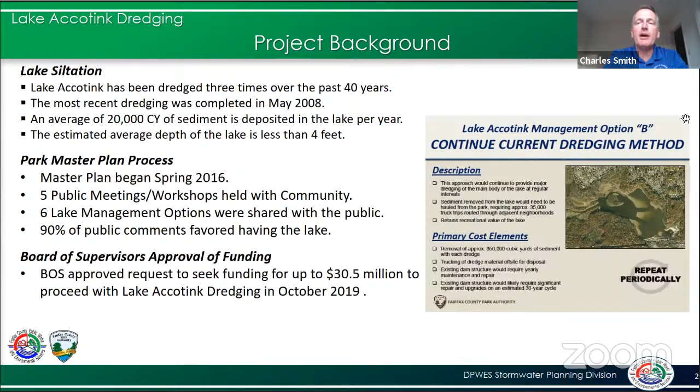Through that master planning process, different management options came out, and what we learned was that the public overwhelmingly supported keeping a lake. That was the impetus for moving forward with option B at the time, which was to continue the current dredging program. The Board of Supervisors approved an initial funding application for a loan amount of $30.5 million in 2019. As Supervisor Walkinshaw also stated last week, the board approved us to move forward with an application for an additional $30 million. I'll remind folks that if that second $30 million is approved, it's not money we will spend necessarily - it's just money that will be made available by the state should we need it. That's the important distinction.

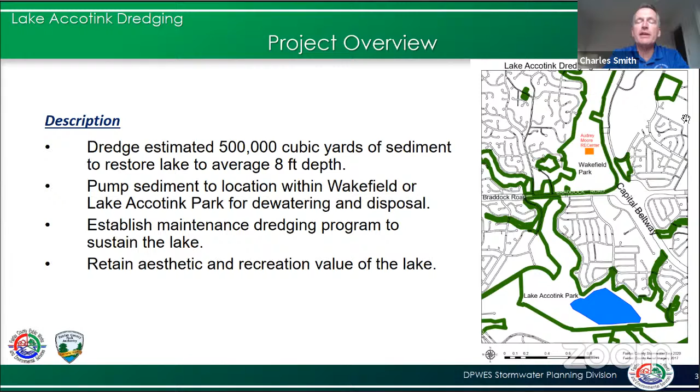In addition, we have to establish a maintenance dredging program, because now we know this lake is filling in rather rapidly from sediment that comes from the watershed above. We'll need to do maintenance dredging on a regular basis. We're not sure exactly what the interval will be, but that'll be part of this project - to decide on the interval needed to come back and do maintenance dredging. Of course, this is largely to retain the aesthetic and recreational value of the lake, and it does remove sediment from the Accotink system.

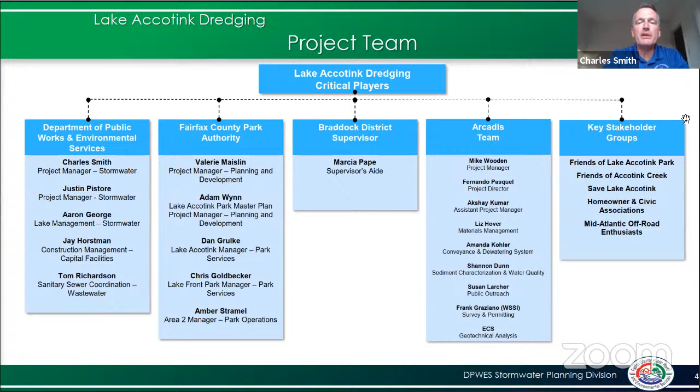So we're at a critical juncture. The alternatives analysis you're going to hear about in a moment is the upfront look at where we can do different activities and how we can conduct them in order to do the project. This is our critical time to hear from you - not only to inform you of what we've learned, but also to hear from you about the things that are most important related to the activities around the dredging.

Once we get all the feedback, August 16th is the closing time for public comment. We will try to make decisions in a rapid way, working with the Park Authority Board and Board of Supervisors, and then report back out. We'll give direction to Arcadis to move forward with design, so sometime next spring they should have a concept plan developed. That concept plan will let us know a lot more about the costs associated with this project and how to conduct it. By 2023, about a year after that, we will be completed with design and permitting and begin dredging sometime in 2023. We anticipate a 3-year dredge cycle. After dredging is completed, we'll have to monitor the lake as part of a permitting process, monitoring the different areas we've impacted and or restored related to the project. And with that, it's my last slide, and I'll turn it back over to Judy.

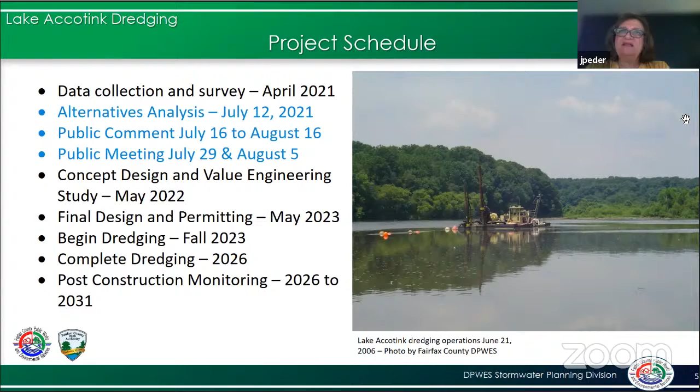So as mentioned, we'll be presenting on the results of the alternatives analysis that was performed by Arcadis and WSSI. The results of that analysis are included in the alternatives analysis report posted to the project website. For the outline of this presentation, we'll follow the general outline of the report, starting with a brief introduction of background information covered in sections 1 through 3. Then we'll touch on proof of concept screening performed on dredging, dewatering, and disposal methods. Then we'll move on to a summary of the environmental and cultural resource evaluation performed, and then the bulk of the conversation will be related to the discussion on the development and analysis of the different project alternatives, which focus on the potential dewatering locations and pipeline alignments.

I won't cover too much of this since Charles previously mentioned the overall scope of the project and the objectives that went into the alternatives analysis. I will reiterate that the main difference between this project and previous dredging events is the maintenance dredging component. So as we were evaluating the different alternatives, we were considering how the areas chosen for the dewatering location will be used for both this base dredging event as well as future maintenance events.

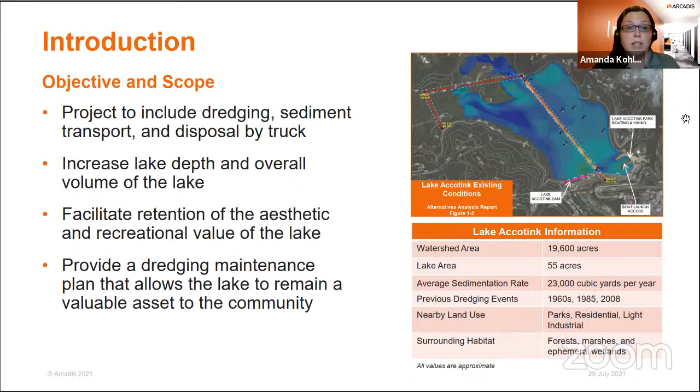To support the preparation of the alternatives analysis and prepare for the future design, field investigation activities were performed between November 2020 and March of this year. Activities included hydrographic survey, performed to support updating the dredge volume estimates and identify major debris that could impact dredging. Sediment testing was performed to identify the composition of the sediment in the lake, which will help inform the potential dredging methods, dewatering methods, and disposal options. Bench scale dewatering tests were performed to support evaluation of the dewatering method, with a focus on geotextile tube dewatering. Lastly, soil testing was performed to identify geotechnical conditions along the shoreline and support evaluation of potential pipeline alignments.

For the alternatives analysis, the criteria against which the various components of the project were evaluated were developed in consultation with Fairfax County. These criteria were grouped into 4 major categories, including park management, community, environment, and construction and dredging program operations. Component-specific subcriteria were also developed for each of the project components evaluated during the alternatives analysis.

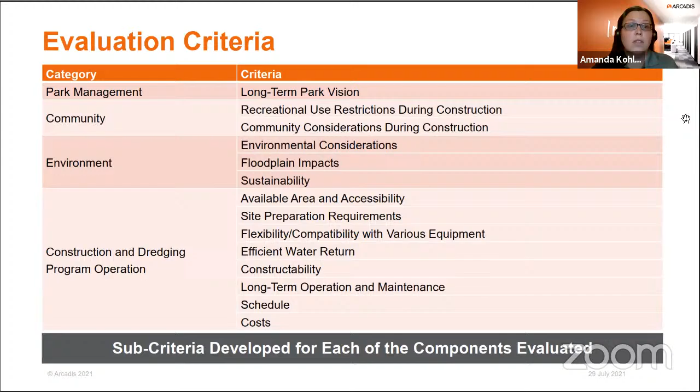To reiterate some of the assumptions made to support the analysis, the target final water depth after dredging is 8 feet. Based on the recent survey and anticipated ongoing sedimentation between now and the end of the project, that corresponds to a dredge volume between 450,000 and 500,000 cubic yards, depending on certain options. The overall construction schedule is assumed to be 3 years, but to account for the time needed to prepare for dredging, as well as remove temporary systems after completion, active full-scale dredging is assumed to occur over a 2-year period, equating to an average dredging rate of 950 cubic yards per day.

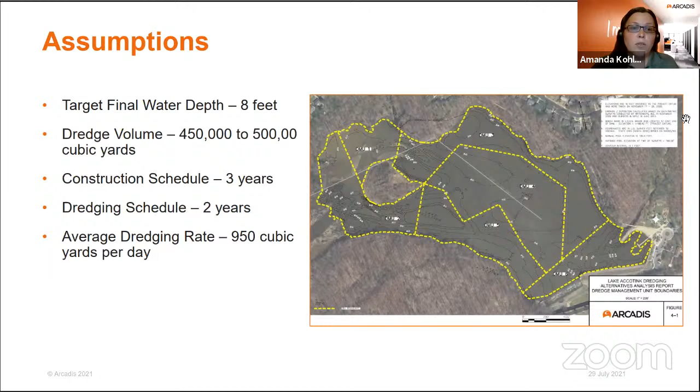So now diving into the results of the alternative analysis. The first type of evaluation performed was a proof of concept screening of potential construction methods for dredging, dewatering, and disposal. The actual means and methods for these components will be left up to the contractor. So looking first at dredging.

The dredging methods evaluated include mechanical dredging, which uses a bucket to remove sediment and debris from the bottom of the lake. There's hydraulic dredging, such as a cutter head dredge, which breaks up the material at the bottom of the lake with the cutter head and pumps sediment and water, creating a slurry to a secondary location. Then the third option evaluated is an amphibious dredge, which comes with interchangeable heads, so it can act as either mechanical or hydraulic.

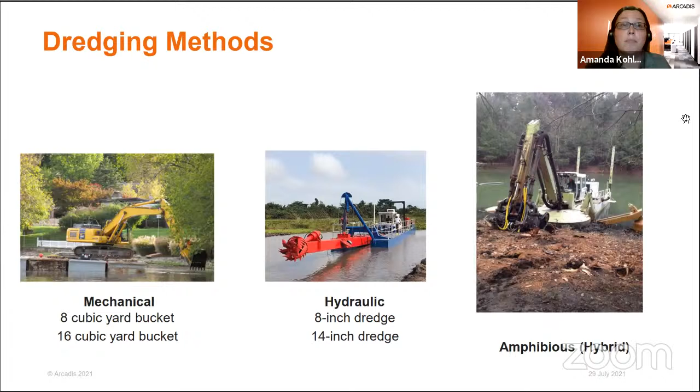Each of these methods was evaluated against the dredging evaluation sub-criteria and ranked as either highly compatible, medium compatibility, or low compatibility. The results were included in the evaluation table presented in the exhibits of the alternatives analysis report. If we simplify the evaluation tables included in the exhibit, we would see something that looks like what's currently being shown on the screen.

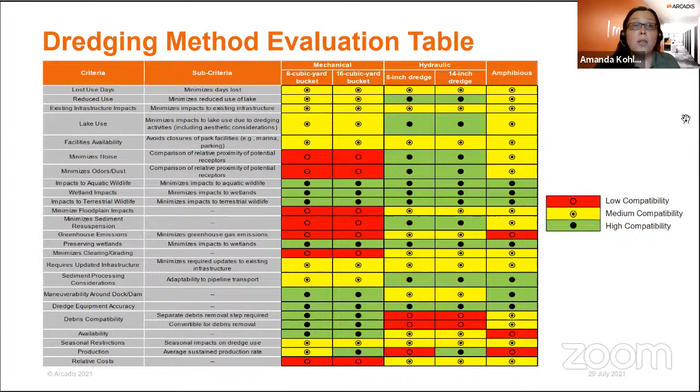Because this is a little bit difficult to read, next slide, the way that you'll be presenting the information are these simplified bar charts. One thing to note is that as part of the evaluation, we did not provide any weight to the criteria. So getting into the actual results of the dredging method evaluation, all dredging options are considered feasible.

The main challenges with each of the dredging methods include debris handling for hydraulic dredging. If hydraulic dredging is selected, there will need to be a separate debris handling operation. For amphibious dredges, those have a low production rate, so you're likely to see multiple dredges out on the lake to complete dredging with that option.

And lastly, for mechanical dredging, there's community impacts such as noise and floodplain impacts, and that's predominantly related to the support equipment that is needed for mechanical dredging, such as material scows and/or a secondary slurry plant to create the slurry for pumping of the sediment.

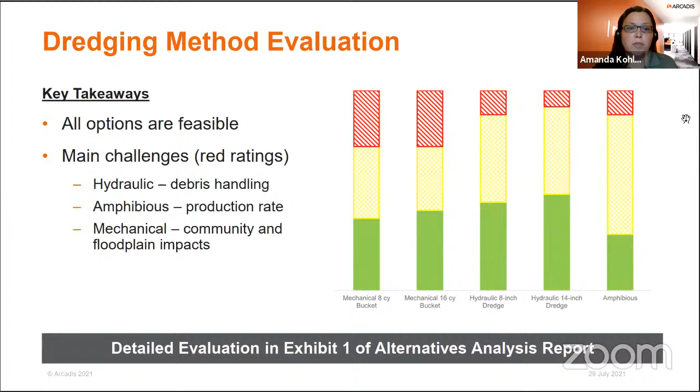Next slide. So the next proof of concept screening that we'll look at is the different dewatering methods.

The methods that were evaluated include passive dewatering with geotextile tubes, passive dewatering with a desanding option, which can create a material with less fines that may be more preferred for beneficial reuse. The third option evaluated is mechanical dewatering, which can include multiple processes or equipment to separate the sediment from the slurry. And the last option evaluated is gravity dewatering with a drying agent.

One thing to note about this option is that it's not readily compatible with slurry transport of sediment, so it would be limited to use at dewatering locations immediately adjacent to the lake.

So for each of the dewatering methods, the area that is estimated to be required was estimated, and those areas are shown on the screen. And there were certain assumptions that were made for each of these.

So the area that's needed for passive dewatering is highly dependent on the ability to stack the geotextile tubes, as well as the need for the time needed for dewatering.

For mechanical dewatering, the area is dependent on the different types of processes that are used, as well as the amount of storage or tanks that are assumed to be needed in the system. Next slide.

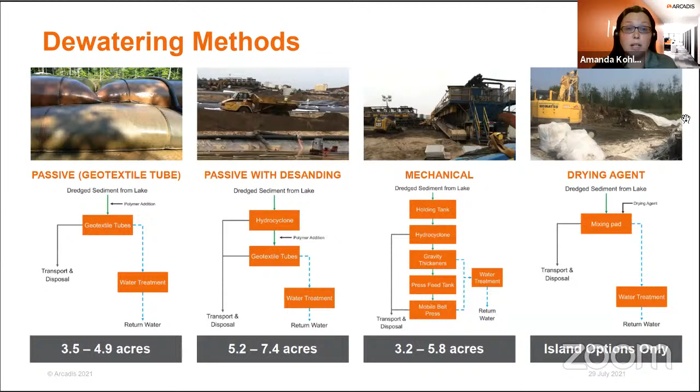So the results of the dewatering method evaluation are summarized here. The key takeaways are that passive dewatering is simple and relatively low cost, but it does require a relatively large, flat area for operation. Mechanical dewatering can accommodate a higher throughput and creates a drier material, which can be helpful for disposal options, but it is a much more complex and therefore usually has a higher operation cost.

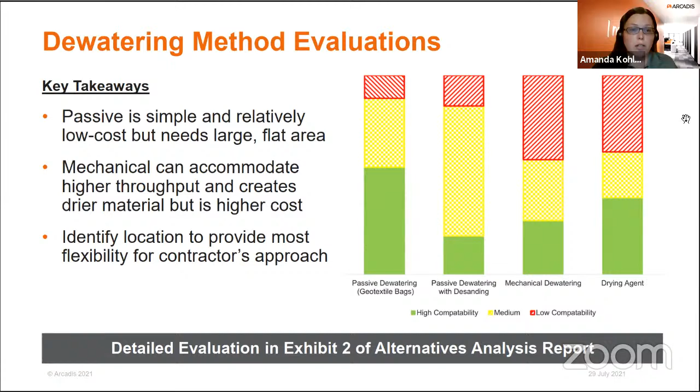So as we discuss the different dewatering location alternatives later in the presentation, one thing to note is that we have assumed a passive dewatering system due to that lower cost, as well as general lower community impacts such as noise. So although we do assume passive dewatering, the intent really is to leave the options open for the contractor as they may have an innovative way to address sediment dewatering.

Next slide. So the final proof of concept screening that we'll look at is the disposal location options.

So in general, the disposal location options can be divided into either multiple different on-site uses, such as using the dredged material to expand the island, restoring banks of nearby streams, or other county uses. Off-site options would include off-site reuse or off-site landfill.

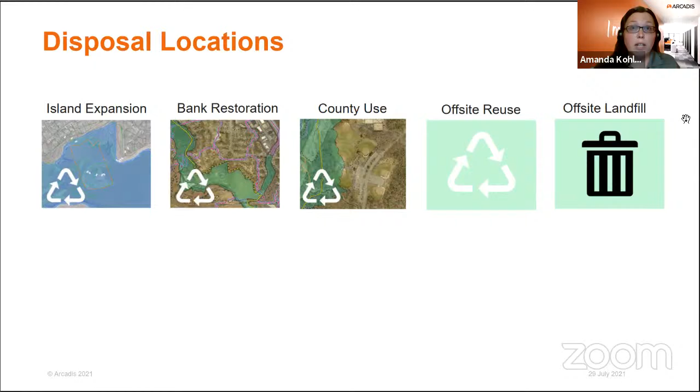Next slide. The results of the disposal location screening indicate that all of the options can be paired with any of the dredging and dewatering methods. Multiple disposal locations may be used, and if an on-site use is selected, it's likely that an off-site option would also be needed based on the amount of material that's being dredged, both for the base dredging as well as handling any future maintenance dredging volume.

The benefit of off-site use is that there's no public impacts, but there is typically a higher cost associated with those off-site options. On-site use has a lower cost, but there is generally varying public impacts, such as temporary closures of area where reused material will be placed and potential noise and dust impacts during placement.

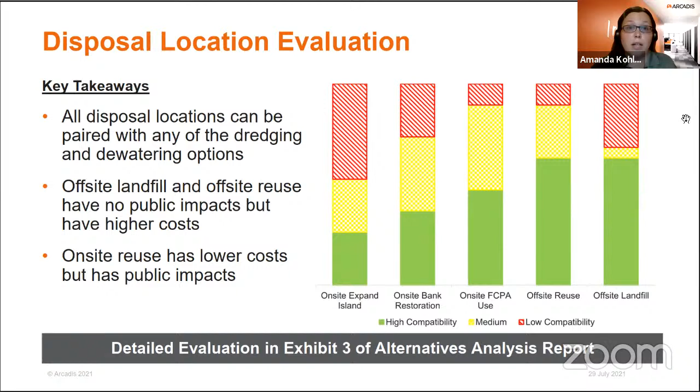Next slide. So the next section that we'll cover is an overview of the environmental and cultural resource evaluation performed. Next slide.

The information presented in the alternatives analysis report for potential wetland and vegetation impacts provides a likely worst case scenario, as the areas are based on a desktop evaluation of potential features such as streams, wetlands, and vegetation. It tabulates any intersection of a potential limit of disturbance with those noted features. Additionally, the initial evaluation does not distinguish between temporary or permanent impact, and we'll note that permits will require avoidance and minimization of impacts to these features. So it's assumed that actual impacts will be less than those noted in the report.

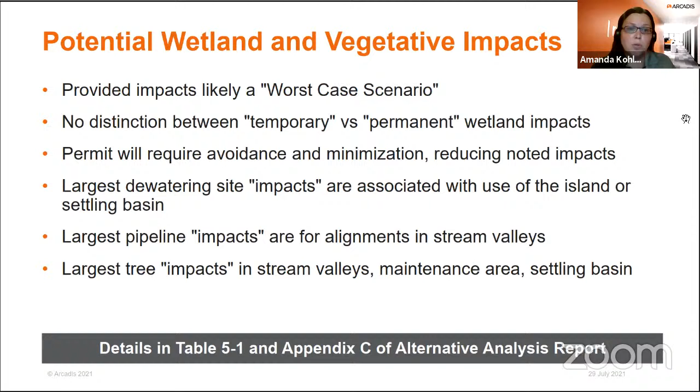The evaluation of potential cultural resources was also performed at the desktop level, based on review of the Virginia Department of Historic Resources database for previously recorded cultural resources within or adjacent to potential limits of disturbance. 7 sites were identified based on this desktop evaluation. None of those sites have been evaluated for listing in the National Register of Historic Places, but some could meet Fairfax County criteria for local significance.

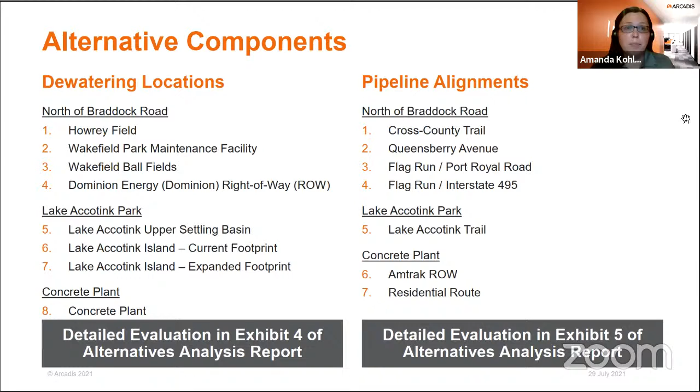Combining those different potential dewatering locations with their associated pipeline alignments results in 21 potential alternatives. From this initial list, certain alternatives were removed from consideration during the alternatives analysis process, as documented in the report.

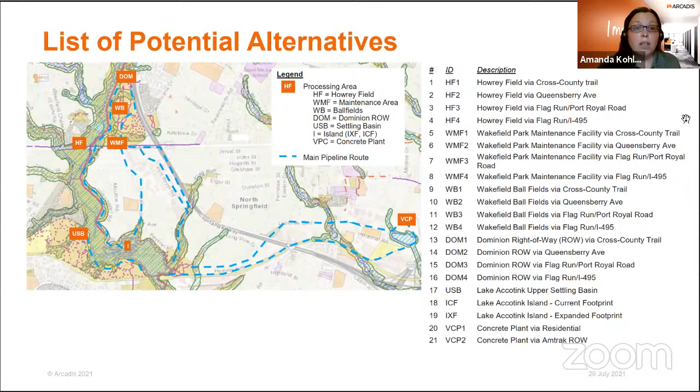Alternatives using the Queensberry Avenue pipeline were removed from consideration due to impacts to the community as well as costs. The Wakefield Ballfield dewatering location alternatives were removed due to legal impacts and an inability to replace the facility to meet Title IX obligations. The concrete plant dewatering location was removed from consideration as the property owner is unable to accommodate these operations.

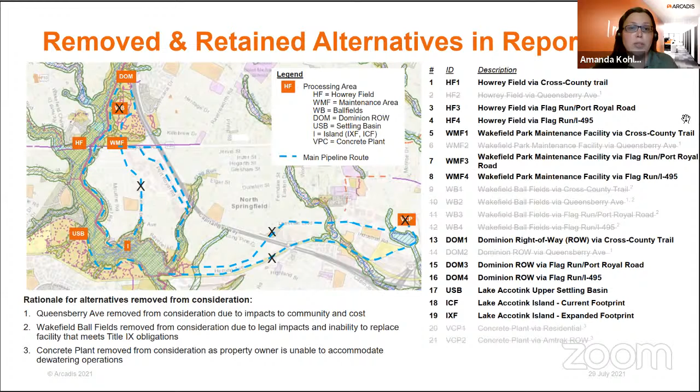We'll now talk about the 12 remaining alternatives that were left in the alternatives analysis report. Next slide.

Since the alternatives analysis was prepared, we understand that county staff have recommended removal of Howrey Field alternatives. So while we will see information on Howrey Field presented later, we won't go into much detail on those slides.

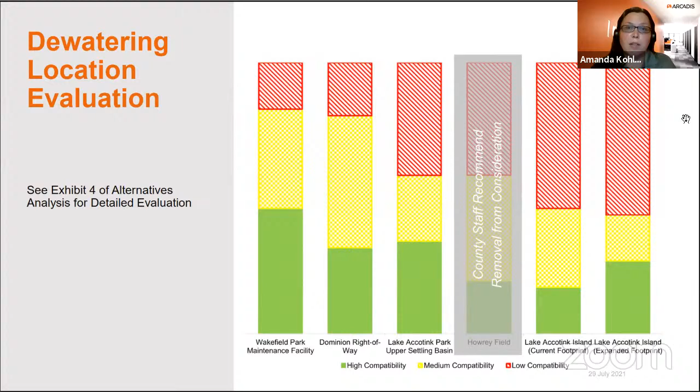Before I go into detail on the actual results of the evaluation, I want to familiarize everybody with the layout of this slide.

For each of the slides showing dewatering location evaluation results, you'll see on the right a graphic showing conceptual dewatering layout, assuming passive dewatering with geotextile tubes where that option is feasible. You'll also note in the upper left-hand corner an anticipated truck route that would be used, including transportation of

the dewatered sediment off-site or away from the dewatering location. On the left, there are three items summarized, including a summary of the various areas associated with each dewatering location, including the limits of disturbance and any wetlands, floodplains, or resource protection areas that intersect those limits. A summary of the different compatible dewatering methods over a range of dredging production rates is shown in the center, and at the bottom is a summary of the ratings for the dewatering location evaluation, similar to the results shown on the previous slide.

Getting into the actual results of the analysis for the Wakefield Park Maintenance Facility, the key advantages of this location are that it avoids closure of park facilities and limits park use impacts to potential trail rerouting. It also has minimal residential impacts from noise or truck traffic, and it's assumed that improvements can be left in place and maintained for future maintenance dredging events, which will help minimize the cost and time for future mobilization.

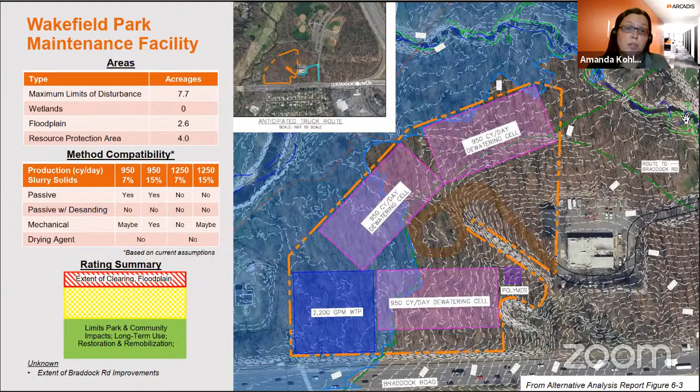Before we dive into the actual results, let me familiarize you with the layout of the pipeline alignment results slides. A graphic for each of the potential retained alternatives or alignments is shown, and key measurements associated with those alignments is presented below the images. To the right of that information is the bar chart summary of the pipeline evaluation results.

For the Wakefield Park Maintenance Facility pipeline alignments, the first alignment follows the cross-county trail. It starts at the northern portion of the lake and follows the cross-county trail along the east side of Accotink Creek, crosses Braddock Road utilizing trenchless crossing methods, and continues up the trail until it leaves the trail behind the park maintenance facility. The key benefits of this alignment include that it minimizes impacts and avoids closure to park facilities.

There's minimal tree clearing anticipated as the pipeline would follow the existing trail right-of-way, and there are cost and schedule benefits due to being the shortest and most direct route to the dewatering facility. The key challenges associated with the cross-county trail alignment is minimizing the temporary disruption to sections of the trail during construction, as well as a majority of the alignment occurring within the floodplain.

The second retained alternative alignment is the Flag Run to Port Royal Road alignment. This alignment starts near the marina area of Lake Accotink Park, travels up the Flag Run Valley until turning northwest to follow the Port Royal Road right-of-way towards Braddock Road, where a crossing will be installed using trenchless crossing methods. North of Braddock Road, the alignment turns west towards the maintenance facility, crossing under the Wakefield Park entrance.

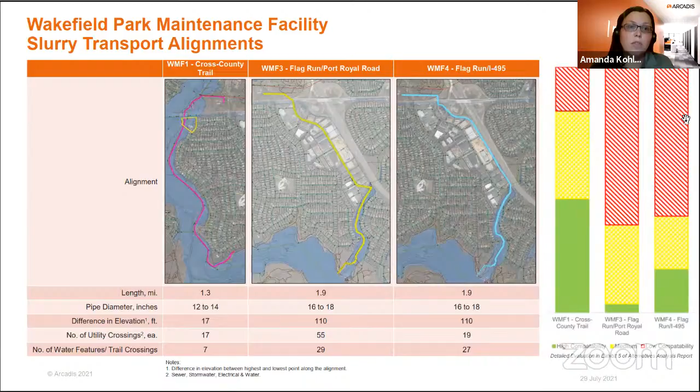Moving on to our next dewatering location, the Dominion right-of-way. The key advantages of this location include that it avoids and minimizes tree and wetland impacts due to occurring within the cleared areas of the existing right-of-way.

It's anticipated that any improvements will be able to be left in place and maintained for future maintenance dredging events. The key challenges with this location include its being within the floodplain, which will again require certain considerations during design to minimize potential downtime due to flooding.

Another consideration and challenge is the general accessibility of this area and truck access to the dewatering location, including both the truck traffic on Wakefield Park, as well as identifying available areas for those trucks to wait to be filled with dewatered sediment. One key unknown with this location that could change how it is ranked is any potential use and area restrictions within the utility easement.

As an example, if the stacking height of the geotextile tubes is limited, either more area will be needed to perform the passive dewatering, or dredging production rates will need to be reduced, potentially extending the schedule.

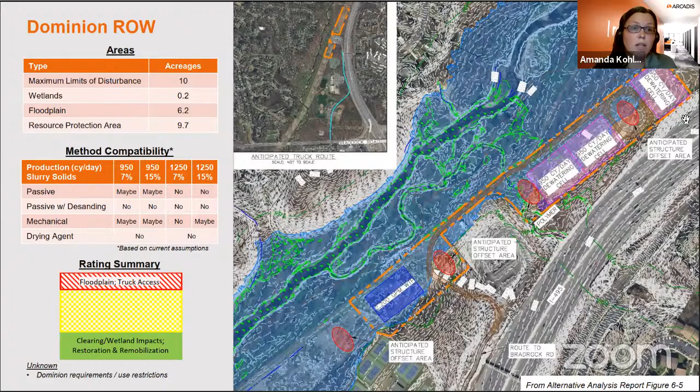Looking at the alignments for transporting the sediment slurry between Lake Accotink and the Dominion right-of-way, you'll notice similarity south of Braddock Road with the alignment shown for the maintenance facility. The advantages and challenges associated with those sections are similar.

Focusing instead on the sections north of Braddock Road, all of these alignments are the longest of the retained alignments that were evaluated, due to the location of the dewatering location. For the alignment along the cross-county trail, this longer route does mean the potential for increased trail disruption during construction, although this alignment does have fewer utility crossings and lower energy use due to a lower change in elevation compared to the other two alignments to the Dominion right-of-way.

North of Braddock Road, the advantages and challenges associated with the Flag Run Port Royal Road and Flag Run I-495 alignments are similar. These alignments were identified to minimize short-term disruption to Wakefield Park Road, as well as minimize tree clearing by following existing cleared areas. Challenges for these alignments include access for operation and maintenance activities and temporary road closures where the alignments follow Wakefield Park Road.

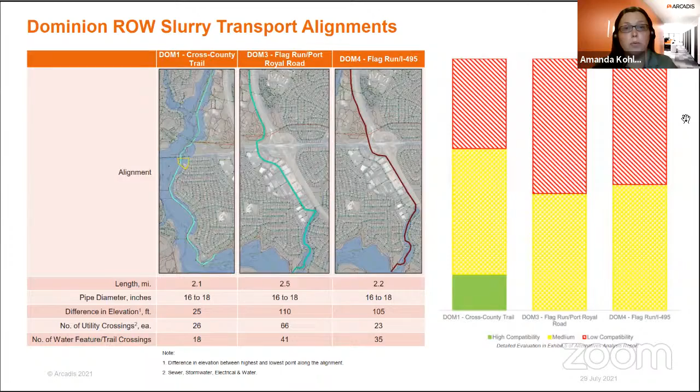For our next dewatering location, we're moving within Lake Accotink Park itself, looking at the upper settling basin, located to the west of the lake. This area was previously used for disposal of sediment during the 1980s dredging event. The key advantages for this location include its proximity to the lake while being outside the floodplain.

This proximity will allow for easy return of water to the lake using the existing infrastructure that remains from that 1980s dredging event after it has been repaired and improved. It's also assumed that any improvements installed for site preparation will be left in place and maintained for future maintenance dredging events.

The key challenges associated with this location include the ability to accommodate the dredging production. It is assumed currently that the limits of disturbance shown will be outside the areas that were previously used in the 1980s event.

Additionally, there will be a need to either close or significantly restrict use of the Lake Accotink Trail along the western side of the lake that connects the dewatering location to Rolling Road, as this will be the main access point for truck traffic. Due to the proximity of that access route to residents, there is likely to be noise impacts to those residents adjacent to that access point.

Another key challenge with this alternative is that it would result in permanent wetland impacts, so there is a cost to mitigate and a need to relocate the stream if this site is chosen.

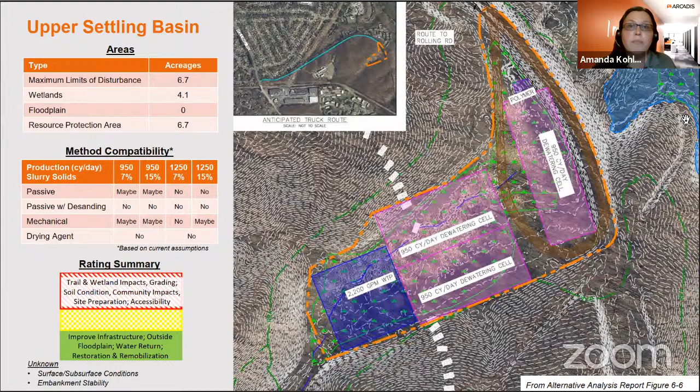The pipeline transport for transporting the material from Lake Accotink to the upper settling basin is shown here. The pipeline starts northwest of the dam and follows the main trail leading up to the settling basin. The key advantages of this alignment include that it is the shortest pipeline alignment evaluated and is the most straightforward from a constructability standpoint. This alignment is located entirely within Lake Accotink Park, so there are no external property owners or easement holders involved. Besides temporary trail disruptions, no disruptions to park facilities are anticipated.

The key challenges with this alignment include the recreational impacts due to temporary disruption to trail access during construction of the pipeline, as well as potential community impacts due to truck traffic from Rolling Road to the northern portion of the alignment.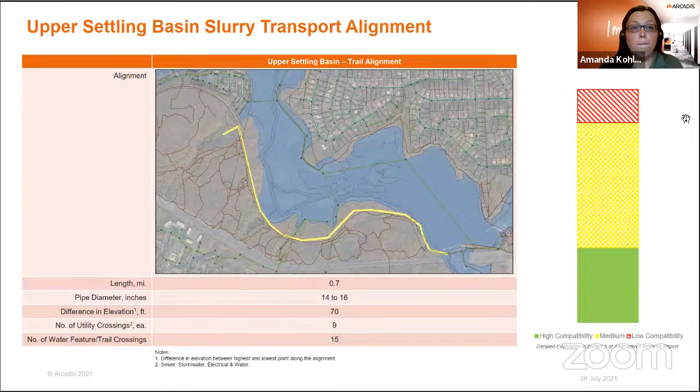We'll skip fairly quickly through these next two slides, as Howrey Field is no longer being recommended for use as a dewatering location.

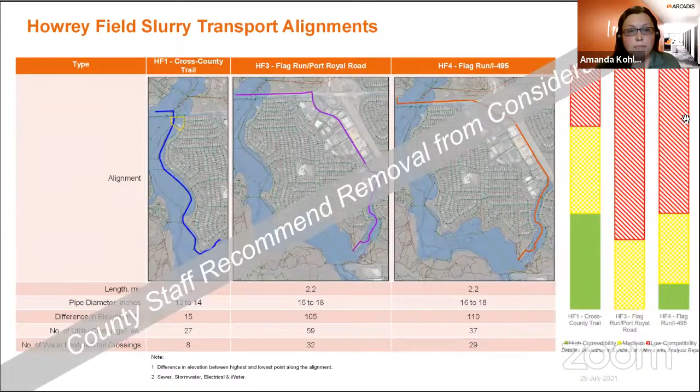Moving into Lake Accotink Park, the next dewatering location is the current footprint of the island within the lake. This location is not compatible with geotextile tube dewatering, so the conceptual layout assumes gravity dewatering with drying agent would be used.

The key advantages of using this location are that no pipeline is required, as dredged sediment could be transported by barge to the island for dewatering. Additionally, since this location is within the lake, water return would be extremely easy, returning directly to the lake.

In addition to not being able to accommodate passive dewatering, other key challenges include accessibility — all material and equipment would have to be transported by barge to and from the island, and given the limited existing water depth, barge transport could be limited.

Additionally, this location is located entirely within the floodplain and is predominantly wetland, so there would be floodplain and wetland impacts associated with its use.

The final key challenge with this option is the residential impacts due to trucking, as all trucks leaving the site would follow along residential areas, which would see an increase in traffic as well as noise from the trucks.

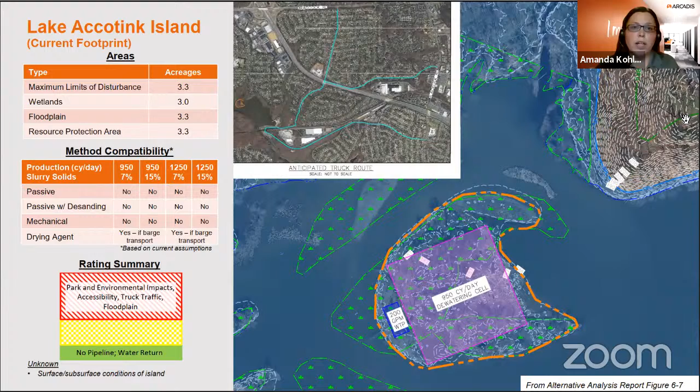So the final retained dewatering location is the island, but with an expanded footprint. We assume the island would be expanded to create a land bridge connecting it to the adjacent shoreline.

The key advantages of this layout include, again, no onshore slurry transport pipeline required, and ease of water return to the lake. Because we'd be building a land bridge, there's potential to design the area to accommodate multiple dewatering methods. The key challenges include that it reduces the overall lake footprint.

There are trail impacts and potential closures needed to allow truck access via the land bridge. Additionally, trucks would be traveling through residential areas, so there would be residential impacts in terms of increased traffic and noise.

Finally, something to consider, especially during initial construction, is accessibility. Similar to the previous location, any initial construction would have to be by barge until the land bridge is built. After that, the issue is assumed to become minor, since access to the island would be via the land bridge.

Key unknowns associated with this location include the surface and subsurface conditions of the island and land bridge area and their ability to support the proposed activities.

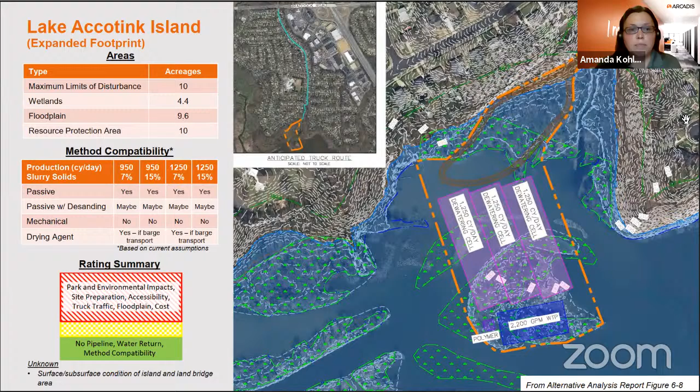That concludes the summary of the key benefits and challenges associated with the dewatering locations and the pipeline alignment components of the retained alternatives.

I'm resharing this slide as a snapshot of the results when you combine the dewatering location evaluation and the pipeline evaluation for each retained alternative. We're showing alternatives with the fewest low compatibility ratings on the left, increasing to the right. With that, I want to thank everyone for your time and attention, and I'll turn things back over to Charles.

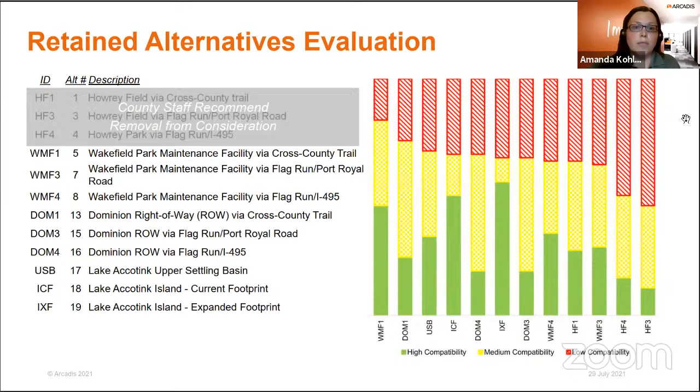I wanted at this point to close the presentation by sharing the staff recommendations. The staff recommendation is to leave the dredging options open, primarily with hydraulic dredging and mechanical debris removal.

This means the material will likely be pumped out of the lake to the work area via pipeline, and that we would use large machines to remove debris such as trees from the path of the barge.

The pipeline options we'd like to leave open again, to retain flexibility during design. We'd like to look at options with the lowest environmental and community resource impacts, recreational resources, but also cost.

The last component is to retain consideration for up to four potential dewatering locations: in Wakefield Park, the Dominion right-of-way; in Lake Accotink Park, the settling basin; also in Wakefield Park, the maintenance area; and lastly, the Lake Island within Lake Accotink Park.

The reason for keeping these options open during the concept design phase, as Amanda indicated earlier, is that flexibility may help us be more efficient in dredging and minimize impacts while controlling costs. If we lock into one location, we could significantly increase impacts to a particular resource or community and increase costs.

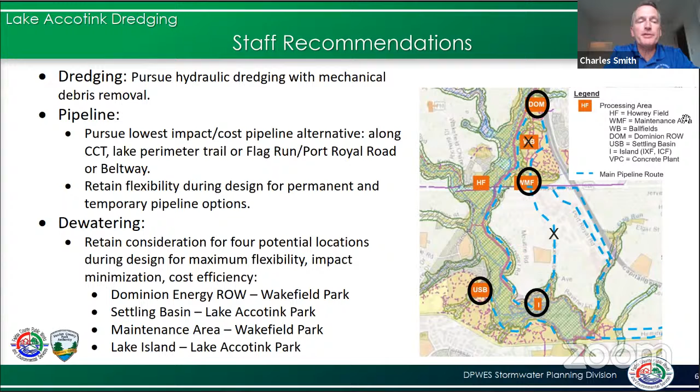I want to reiterate that staff are no longer recommending that Howrey Field be considered as a dewatering location.

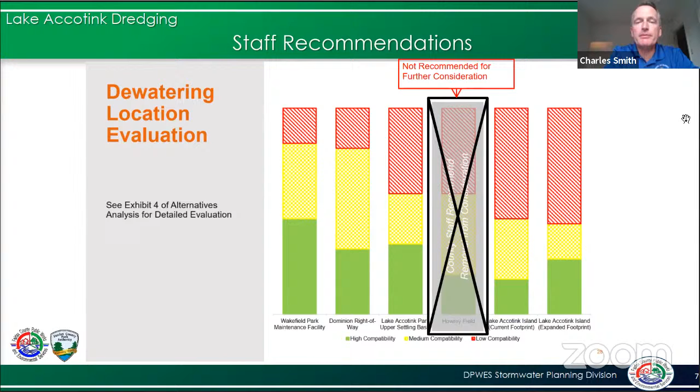I also wanted to share that one of the principal goals within the design will be to minimize impact to the cross-county trail and maintain trail traffic. So those are key objectives to whatever alternative we choose and how we implement it.

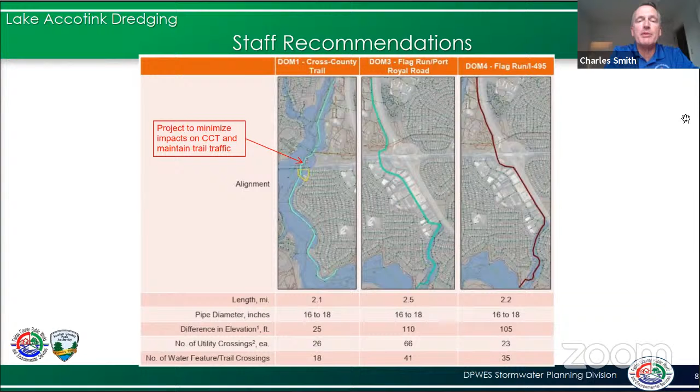So we're going to open it up. I'll turn it back over to Judy in just a second. I do want to remind people, please utilize this opportunity to ask your questions and make your comments, but also it doesn't end here. We're open until August 22nd for comments, and you can submit those through the project webpage, and we'll share that information here shortly as to how to get in there.

Judy? Thank you so much. What an amazing presentation. I know it seemed a little bit long and maybe a little bit complicated, but that's what the next part of this program tonight is about, to answer your questions and make sure that you understand what was presented. The good news is there'll be more opportunities as we move forward. So thank you. And now on to the most important part of the meeting, which is public comment.

I promised I would go over how this works again, because this too is a little complex. For the duration of the meeting, we'll be accepting comments and questions in the public input chat box. If you can't see the chat, please refresh your webpage. And if you want to dial in and speak to us over the phone, please call the number located right above this video, 855-925-2801. You can enter the code right above this video, 8809.

Once you dial in, the recorded message will ask you to press star for more options. And if you want to join the speaker queue, press option 3. That will put you into the speaker queue, but will still allow you to listen to the message. At this point, you might want to step away from your computer because there is a delay and it can be a little confusing. Plus, we'll hear ourselves twice through your phone.